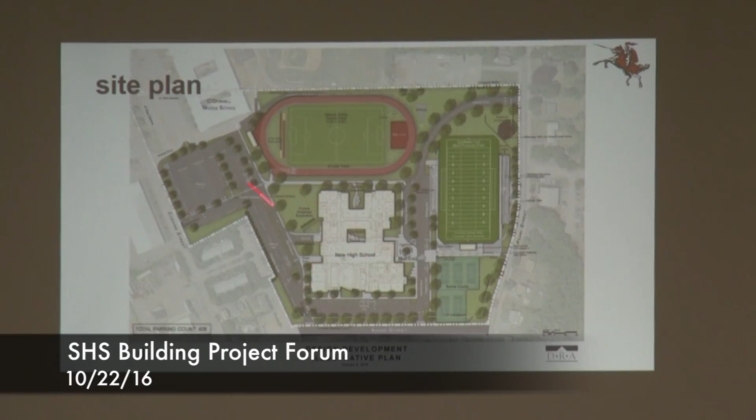Then we retain this parking lot off of Cushing Street that's shared with the middle school right here. We actually expand it in a couple different directions here, but basically keep it in its current location. And because the building is located here, closer to the middle school, not only can we share this parking, but for those special events in the auditorium or in the gymnasium, we can also share the middle school parking lot here that can access the entrance here.

Just to go through, here's a 3-dimensional view. We've got a lot more 3-dimensional views.

Quick question. During the construction, will they lose the on-street parking on Adams Street? Yes, we'll get into that. We actually are making accommodations for how to deal with that during the construction.

Thanks. One of the things is you'll see a lot more of these 3-dimensional images now. The way construction plans and documents are done these days, they're not just 2-dimensional drawings, some of which are on these boards here, but we actually create a 3-dimensional computer model that has all of the information in the building, not just the walls and windows and roofs, but also all of the mechanical, electrical, and plumbing systems, so that we can work out all that coordination on the computer before it actually gets built. So a lot of these views aren't just for presentation purposes to show you what the building looks like, but to help work out the details and make sure everything fits together.

I thought the original plan was to add photovoltaic cells to the roof. I don't see any on that. They're not rendered here. They're still an alternate. We're trying to analyze the quantity of them that we can have in the end. But we have plenty of flat roof area that we can add them to, with no obstructions facing south.

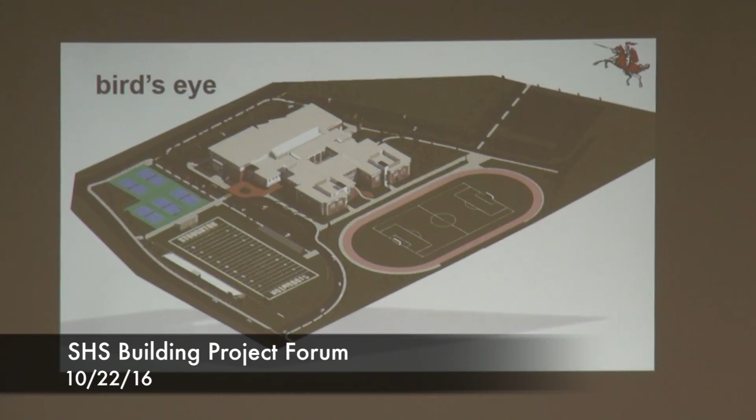The building is closer to Adams Street right out here. In essence, we're standing right about here now, and so the new high school is just back sort of diagonally outside the doors right here.

Here's an eye-level view of the new entrance. The building, as you'll see in plan, is sort of segregated where this is the main entrance. This is the administration area, in nice proximity to that for security and to welcome visitors. The academic parts of the building are to the right, and the community or assembly parts to the left of that entrance.

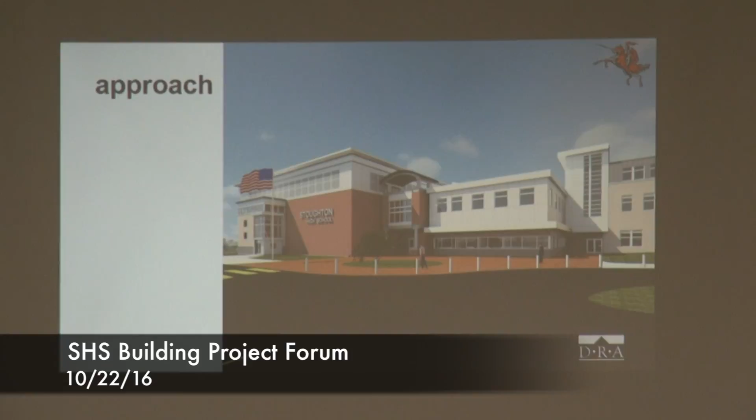So this volume here is the gymnasium above the locker rooms, and in the center of the building behind that is the auditorium. There's a straight-on view of the entrance.

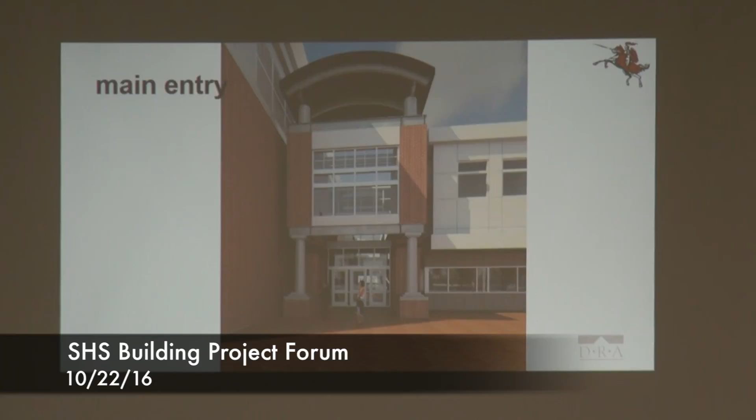We've had several meetings about security, but this will be the main entrance for all visitors. It will be controlled, with cameras and swipe cards, like in an apartment building where you can see who's visiting and remotely open the doors. Folks inside the office area can directly see, and also have cameras, and can control those doors for visitors during the day who go directly into the office before going further into the school.

There's the overall front elevation, and the three-story portion of the building to the right of the entrance, here's the main entrance lobby. This three-story portion is primarily the classroom portion of the building, and these volumes on the front are the gymnasium above the locker rooms, and behind that is the auditorium.

You can see the materials as we go through this, that the building is primarily a masonry building. We studied this during the schematic phase about what kind of design this new high school wants to be, and we took some cues from the local community, where there are several strong masonry buildings, and we wanted to continue that, but with a forward-looking attitude.

So it's kind of a clean, classical look to the new school with a couple different colors of masonry. This red is red brick, this yellow is sort of a beige or buff-colored brick. There's also a darker brick down at the base. So using those three colors of brick with some accents of white precast.

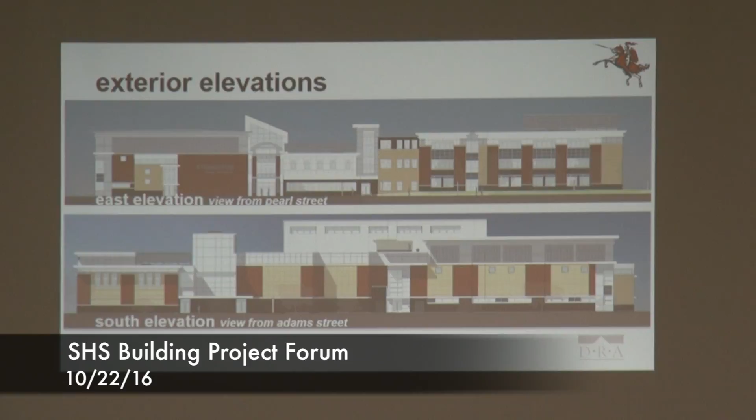And then up higher are some metal panels to form the cornice of the building, together with white framed windows. It has a very classic look to it, but in a more forward-looking or contemporary way. So these are the various four sides of the building, or elevations as they're called.

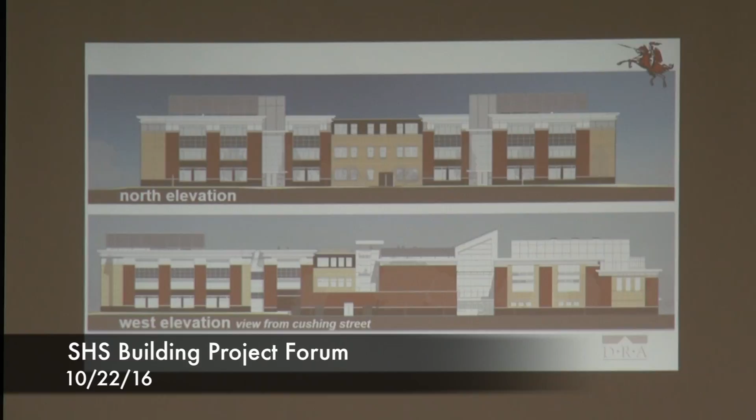Here are the floor plans. So again, here's that front door. Pearl Street is on this side of the plan. Here's the administration area immediately adjacent to that front door.

This is the main lobby, sort of a linear lobby. The bus entrance is on this side of the building where buses would queue up, and those students would enter here. This gray area is the cafeteria, and you can see it's more of a student commons, not just a cafeteria. It's really part of the circulation system of the building.

So as people come in, they'll cut through here to connect to the classroom areas. The assembly areas are to the bottom of the plan. These are the locker rooms, with the gym above that. This is the auditorium, backed up by music rooms here.

So on this side of the building, you can imagine evenings or weekends being utilized, and the rest of the school can easily be closed off and segregated at a couple of key points. All of these spaces are the academic classroom portions of the building, and you can see that they're clustered in smaller groupings.

That really came out of the educational program that was worked on extensively last year, where in addition to regular sized classrooms, there are small group rooms, teacher spaces, collaborative areas, and boys' and girls' rooms.

So these smaller groupings can be utilized in a very flexible way. Right now the school is organized by English department, social studies, math, and so forth. This organization could support that, but it could also support a freshman academy where freshmen are segregated from upperclassmen and take most of their classes in one spot, with science labs and teachers' rooms nearby. It may be organized that way, or as a STEAM or STEM academy focusing on science and technology. So there's definitely some flexibility in the plan.

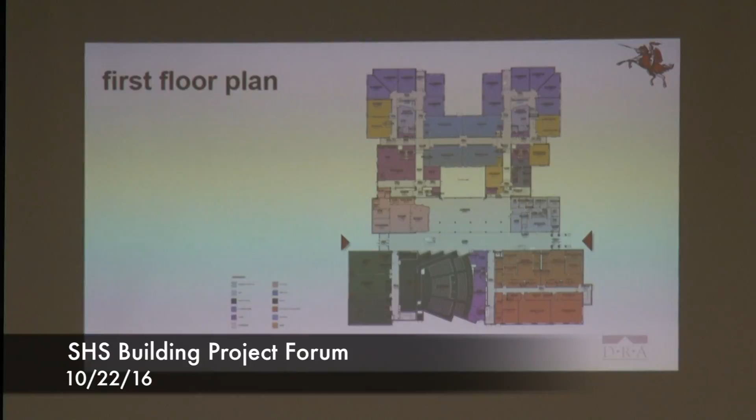The other aspect is it's a fairly compact building overall. It's on 3 stories with relatively short corridors, as opposed to the existing building, which is a sprawling, double-loaded corridor with classrooms on each side. This is a more compact kind of plan.

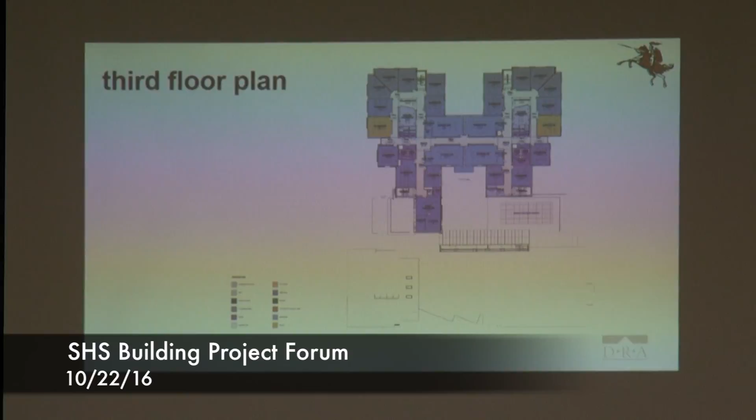Sure. One of the ways they're highlighted here is these purple or beige areas mixed in with the classrooms, so that special needs spaces are very well integrated in the plan. They're not segregated - if you look on each floor you'll see them throughout the plan. This happens not only in these separate classrooms, but special needs students are also mainstreamed and integrated into traditional classrooms as well.

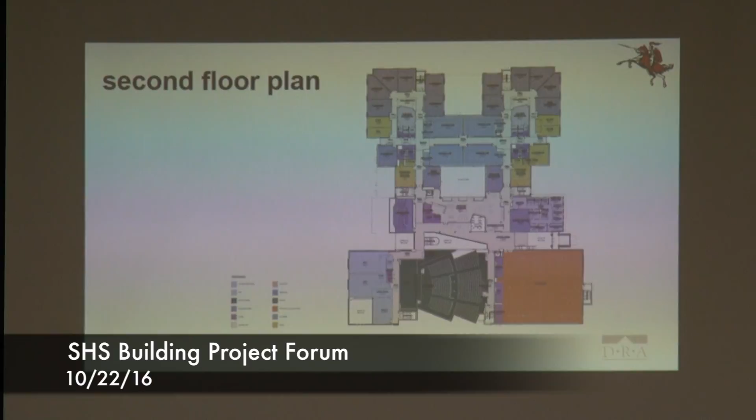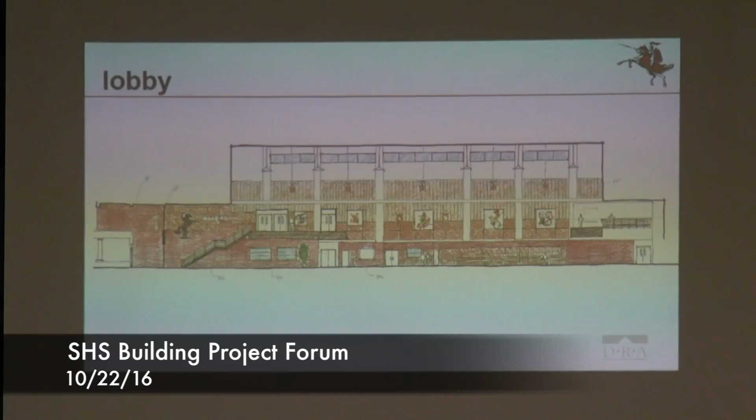And this is how it evolves into hardline drawings where we start identifying materials, so that, as Dom mentioned, we do cost estimating, we know pretty specifically how much of this is brick, how much is wood paneling, how much is acoustical panels, and so forth.

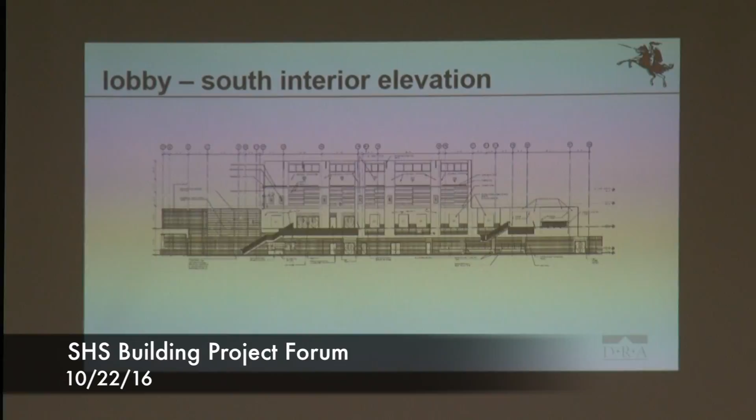Another view of that. Some of you may be familiar with virtual reality. We have goggles that you can wear to experience the space. We can't do it as a large group here, but individually you can put on a goggle and look around, and get a sense for the materials, the space, the volumes, and so forth. It's a great way not only to help us design it, but to communicate it to the owners and users of the space.

And then in the classroom areas, those cluster areas, we have what are known as collaboration areas, so it's sort of part of the corridors. You might say here's one corridor, here's another corridor, but it's a very wide space with a lot of classroom doors off of it, allowing various flexible activities to go on there.

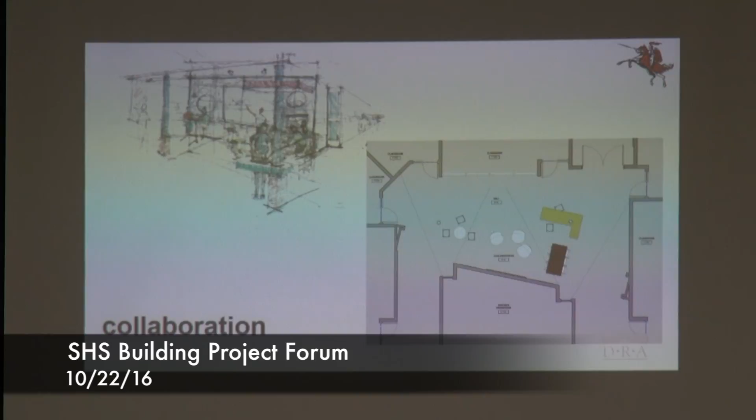But this is one of those flexible spaces that the school is going to have to grow into. They don't really exist today, so honestly, today's teachers and administrators don't know exactly how it's going to work in the future. There'll be some professional development and some trial and error, I'm sure. That's why we want to make it as flexible as possible.

All these pieces of furniture you're seeing here are all movable. They're not permanent, so that things can change over time.

I just have one quick question. Are all the acoustical specifications available somewhere that someone can look at them? Actually, all our documents are ultimately available. They're pretty thick, but we do deliver a copy to the owner. I don't know that they're on the website, Gene, but we can make them available. Gene does a great job of keeping everything available, both on the school website and the Facebook page for the high school. As long as somebody could actually understand all of it. Sure, look at it, sure.

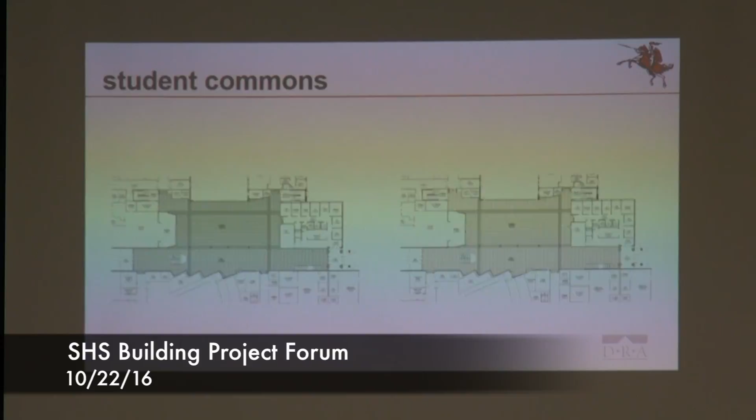When you're right at the ground level where people are coming in off the street, we will have walk-off mats and so forth, but still you want something that stands up to wet and dirty shoes. Here's the section cut through that space on two levels.

And then up above, as we said, the Learning Commons does have walls around it for some acoustical separation, but a lot of the walls will be very glassy, including a glass wall that looks out to the courtyard. So even though it's in the middle of the building, we want to make sure there's a lot of natural light in that space.

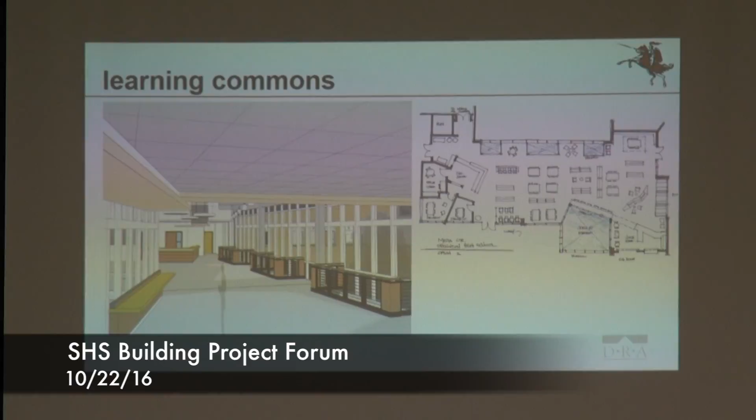And because there'll be a fair amount of conversations and work going on in here, we need to control the acoustics in that space too. So there'll be carpet on the floor and very good acoustic absorption in the ceilings and so forth.

I understand there'll be fewer seats in the new auditorium than in the current one. Slightly fewer seats, yes.

I'm curious about the stage space itself - is it larger or smaller than what we have today? The stage space is slightly smaller, but one of the things in the plan is a cross corridor right behind the stage, with music, a black box theater, and a choral room all directly behind it, plus a dressing room and storage. We have much better support spaces now than the current stage has, so if you balance it out, it'll be a much more functional stage than today, where you have to store things on stage or use it as rehearsal space. In the future, we'll have rehearsal spaces independent of the stage itself, which gives a lot more flexibility.

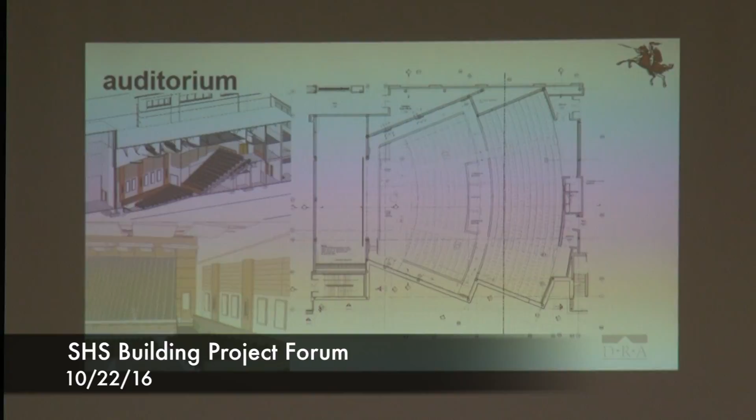Here's that section where the front half of the auditorium has a lower slope and the back half is much steeper. You can enter this back side of the auditorium from the 2nd floor, or enter at the 1st floor level which lines up with the stage, so everything is handicapped accessible. You can enter here, travel down to the front, travel to the stage - there's a level walkway there - and you can also enter at the back of the auditorium and have seats there. So we have handicapped accessibility throughout the different levels of the auditorium.

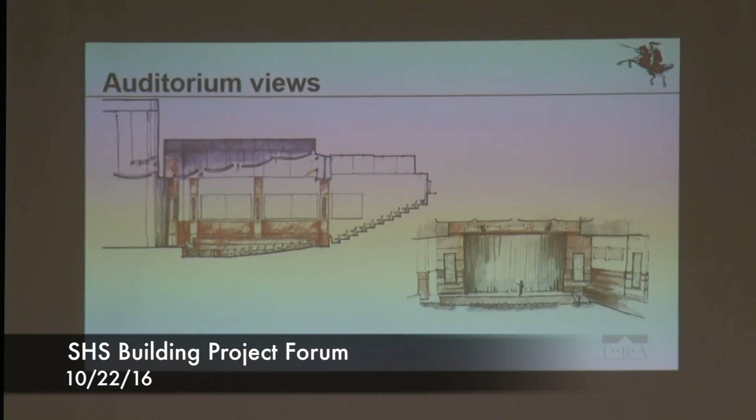We'll also have some catwalks up here for technical assistance in lighting particularly, and as I said, sound systems throughout. We understand how important music is, especially to the high school here.

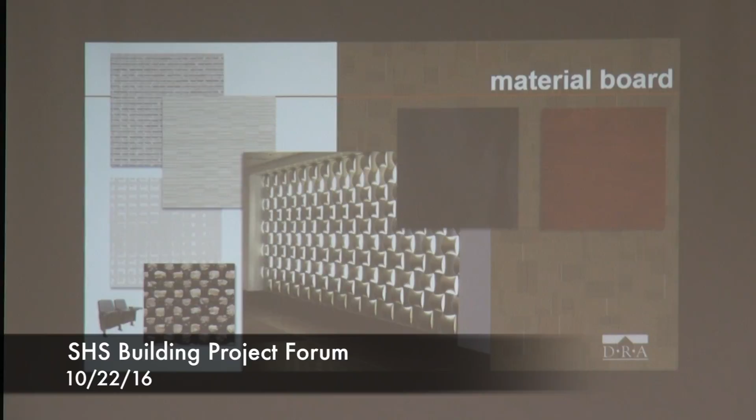These are some of the materials we are going through - this is part of the process nowadays. We've shared this with the building committee and the users of the space. This is just a sample showing our thinking, even though we haven't picked final colors yet, as we select materials. That will be happening in the next few months.

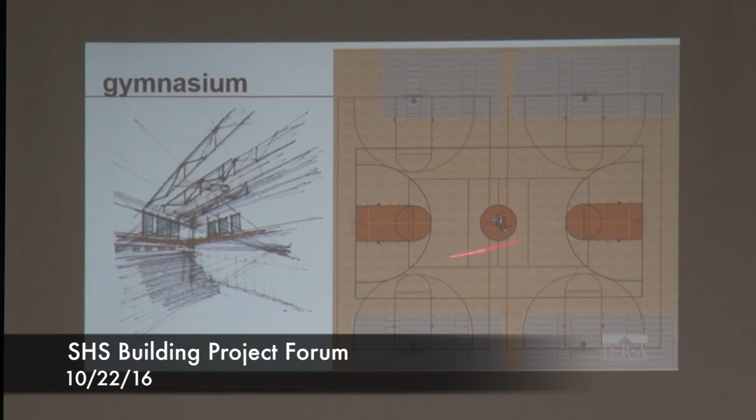In the gymnasium, just to show you quickly, there'll be a wood floor, and we'll be able to integrate some of the team colors. Even on the bleachers - they have bleachers nowadays where you can do logos, either Stoughton or SHS. The bleachers are all retractable, and there are 2 cross courts. This new gymnasium isn't quite twice as big, but is certainly significantly larger than the existing high school gym.

A suggestion - I've seen it done by people who spend millions just on this part of the facility - is that the acoustical and public address system be tested with nobody there. Yes. And then you get a crowd of screaming fans. Right, and you wonder why, after spending millions on the audio-video stuff, you can't hear it. We have a consultant specifically for that to help us design it - usually that issue comes down to the numbers and type of speakers supplied.

If you have just one speaker, and you think turning up the volume when it's louder will help, really you need a number of speakers to distribute the sound so you don't have to crank up the volume and everybody is sitting relatively close to a speaker. Makes the sound more intelligible for folks. So yes, we're taking that into account.

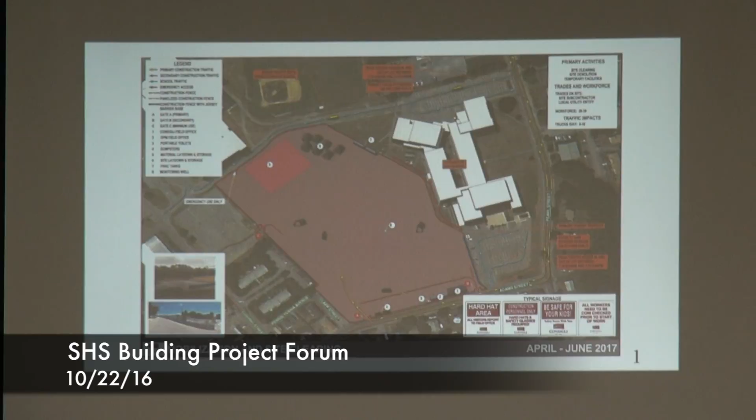Actually, we show our contractor parking on the inside slide, I don't know if you can see it. This red pointer here shows where my contractors will be parking, inside the fence, so we're not in your community. We will limit access; we have an entrance here as well as here. Everybody will be inside the fence before 7 o'clock because they have to be working by 7 o'clock.

No deliveries will happen until after all your students are in, typically not until after 9 o'clock. Same thing between the hours of 2 and 3 -- actually, I think between 1:30 and 2:30 there'll be no deliveries or pickups.

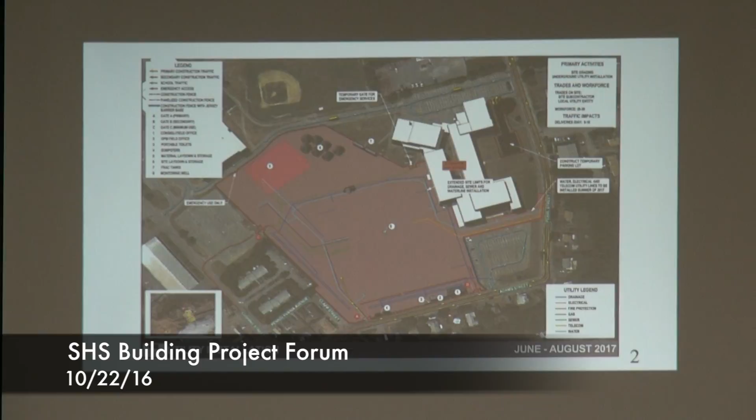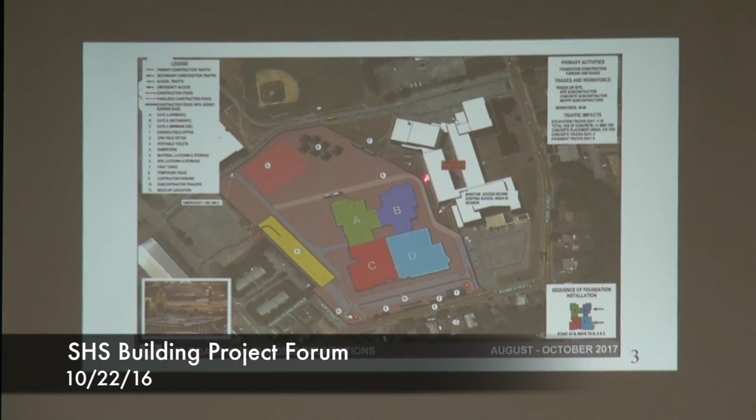We'll start with the construction of the foundations here, and put in our access roads so we can easily access the construction within the fenced area, all while having clear separation between your community and our construction workers. You can see a red line here -- we're maintaining fire safety access around the entire building throughout the entire construction.

And this lot too continues, right? That continues to be yours.

I know parents are going to be asking -- is there any way that the current tennis courts can be removed and reinstalled somewhere else, or are they a lost cause? Actually, I haven't gotten to the next slide yet.

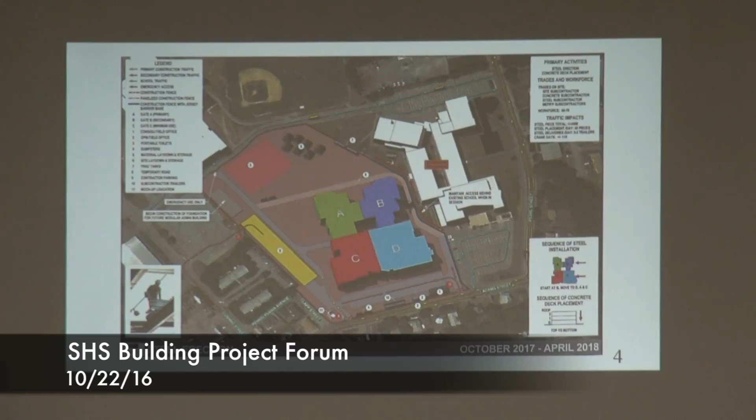Would you go back to the slide before, where we showed the finished product? That area, the brown area adjacent to the pull-up, on the left. The open space - how big of an area is that?

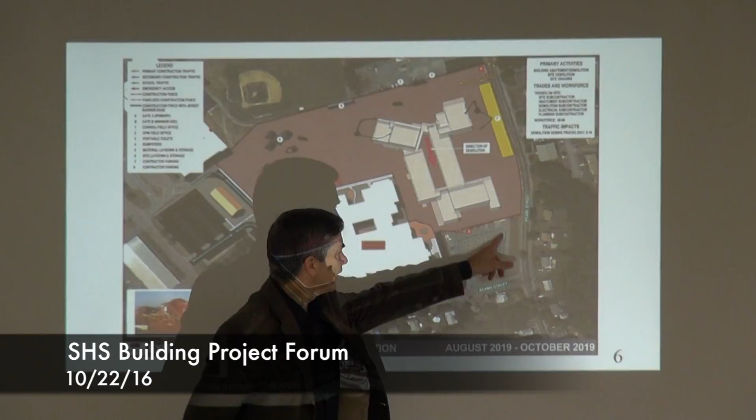Well, if you compare, here's the parking lot right out there - you can see it's a little bit smaller than that, but it's almost that big. That's our future expansion area. If the building ever needed to expand in the future, that's where we'd see it happening without really disrupting any of the site or utility work.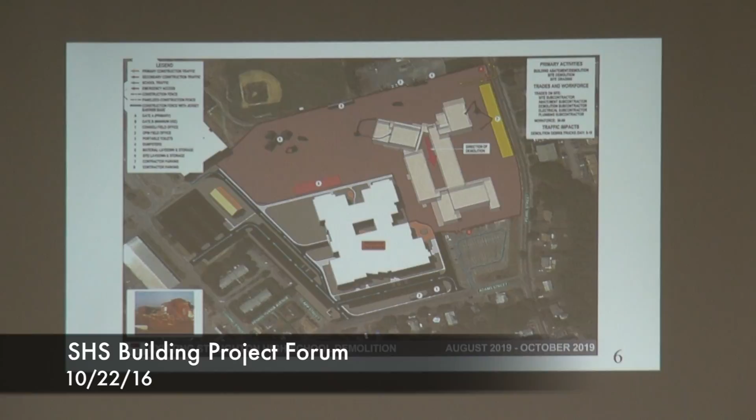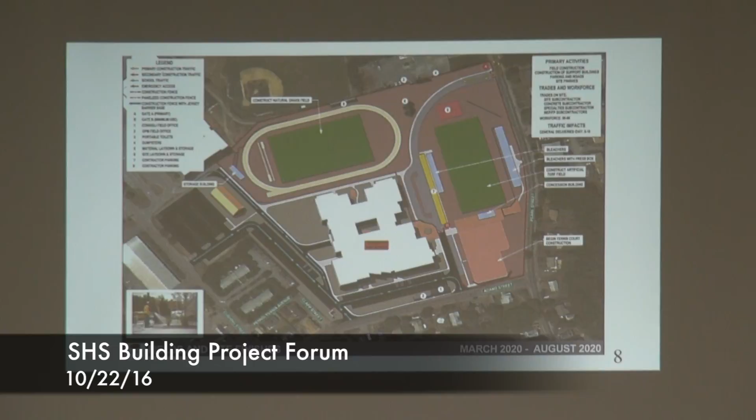Okay. So I think that's what we wanted to cover today. In terms of where we're at, there's a lot of details that will go into the phasing and construction, and that's why we'll have another meeting before construction actually starts next spring, so we can talk about some of those aspects. It's very important that we get input from not only the school staff and so forth, but also the community and particularly the abutters.

Just one more quick question - is the skate park going to be created somewhere, or is that not part of our project? We've talked that over with the town. It is not going to be relocated on this property. So it will be destroyed, but there are no plans? Well, not necessarily destroyed - they're going to take it, they're relocating it somewhere, but they haven't found a permanent place.

They're precast concrete pieces, so they can actually be picked up and moved. So as a minimum, they're at least going to be stored, probably in the DPW yard for now, and if a new location is found, they can be reused.

These are the documents that will actually be put out to bid. I know what construction documents are. There you go. And how soon will those be done? I forget our date, I think it's somewhere around March - 60% submittal, and there are two more submittals to the MSBA.